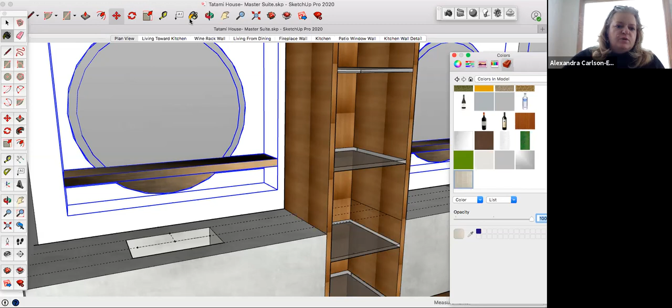And I'm going to go ahead and cover that wall, and it went down all the way perfect because that's kind of how I wanted it. I wanted to see the contrast between the teak and the concrete and this tile.

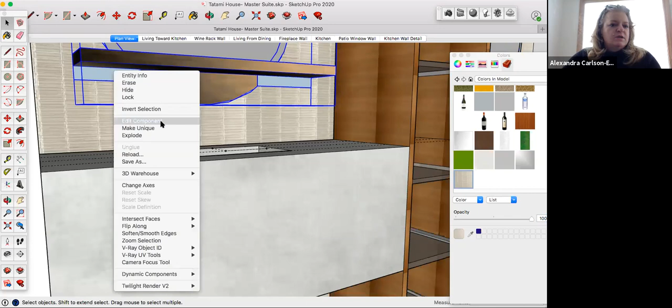Now I have an error on this one little section here, so I'm going to go ahead and say edit component. I'm going to make that go away. There we go. All right, so that's how I would go about doing that.

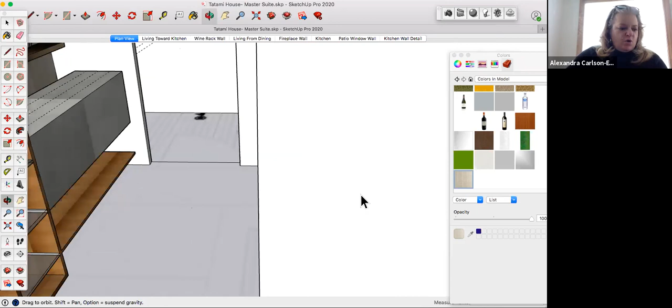Now, back up over in this area of my model, what I had planned was teak on the floor. I could, in theory, paint teak planks on the floor, but I'm looking to actually indicate that this has a texture and a relief, and it's wrapping all up the wall. It's also going to be inside the sauna shower. So this is kind of an important detail that I want to try and get right.

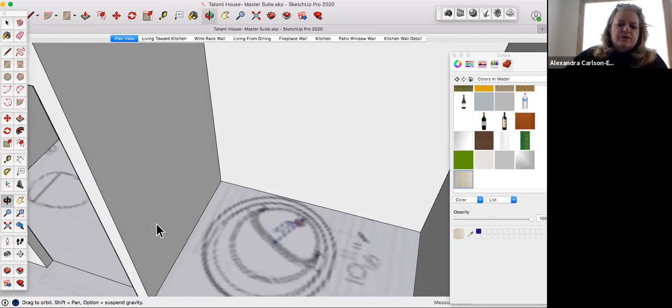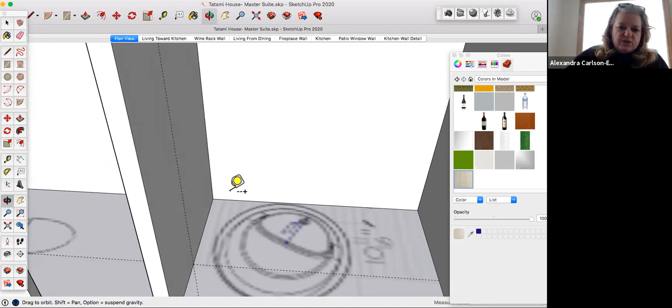So what I'm going to do is first I'm going to go ahead and make a reference line, so that way I know where this stuff is going to line up. Pretty important. The other thing I'm going to do is I'm going to start, because I can actually look at these and I can say, oh, okay.

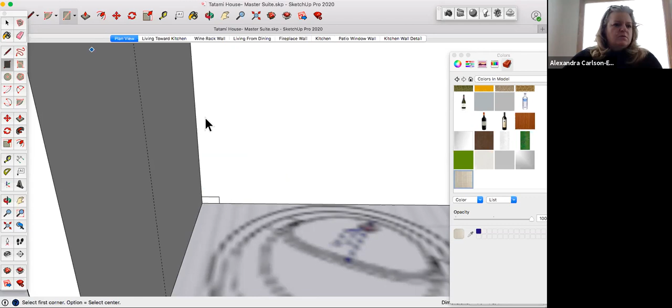So like right here, it's going to be on edge. Okay, I have to figure out how I want to do this. So back up to go forward. How wide is this? That is 2 feet 10 inches. All right.

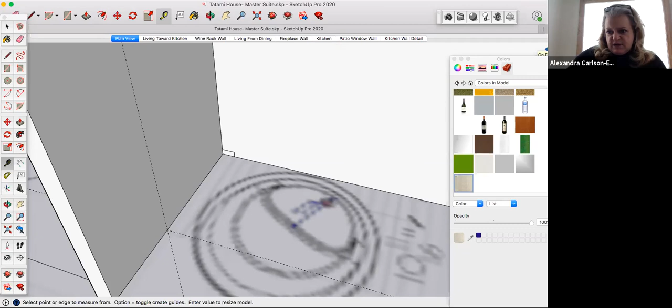And then this is going to be what? What's the width on this? I can't see it, let me move some of this stuff out of my way so I can see it. Okay, so it's probably going to be about 4 inches. So what I'm going to do is I'm actually going to do it out here. This will make sense why here in a minute.

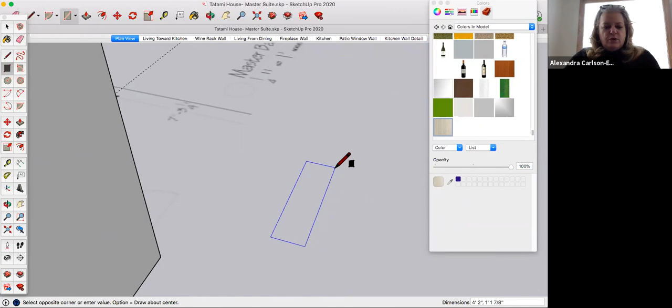I want to go 2 feet 10 inches, 4 inches, there we go. And I'm going to, because I'm only trying to do a texture, extrude it 0.25 inches. I'm not going to make this real thick.

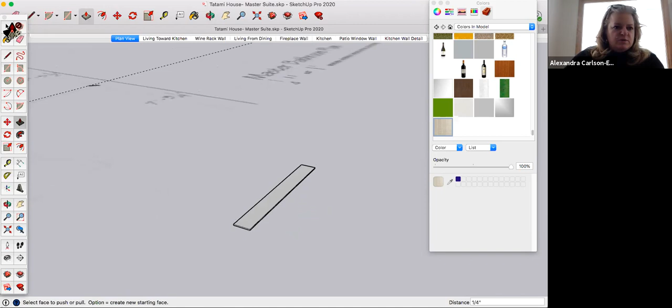The other thing I'm going to do is I'm going to take this. Let me make sure I'm not including my drawing because I don't want to do that. I'm going to right click and say make a component. All right, and this component, teak plank.

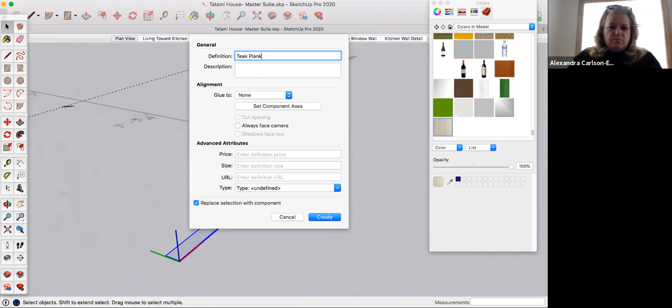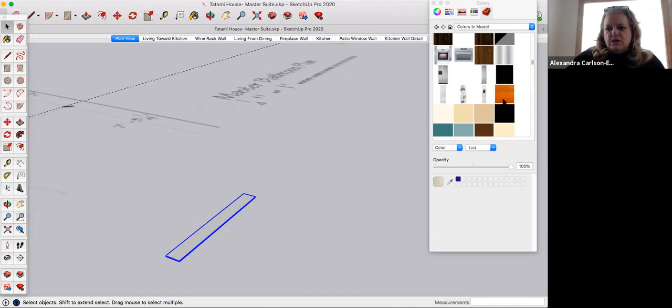Great, all right. Then what I want to do is come over, and because I made it a component, rather than having to worry about getting all the different parts of it, I can find my teak sample, which is, I believe, this right here, and it will paint the whole thing. Okay, so see how that worked out?

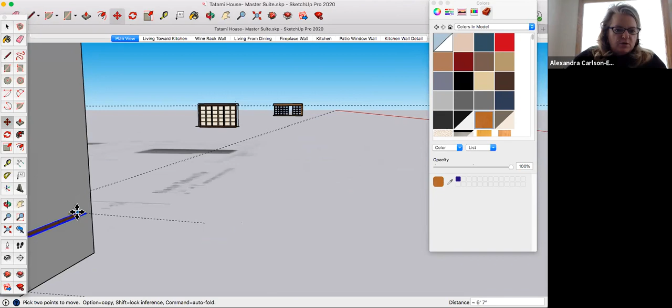All right, so here's the cool bit. I'm going to take this, I'm going to move it, I'm going to move it down into this section. Now, what I need to do though, is I'm going to want a slight gap between these.

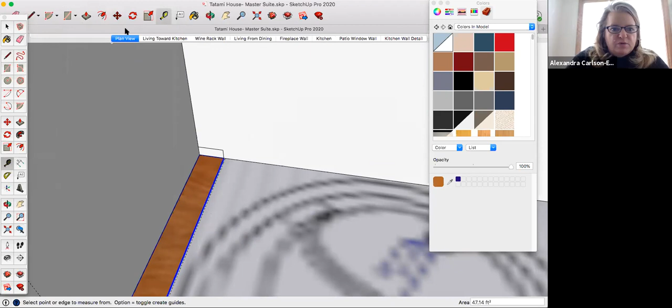So I'm going to take this, move it over, say 0.25. Okay, so edit, copy, edit, paste in place. And then I'm going to move, and remember, I'm going to hit my right arrow. So, oops, that's the wrong one. There we go, I want to move it right into place.

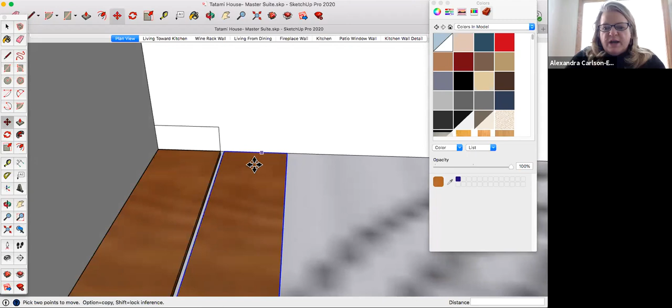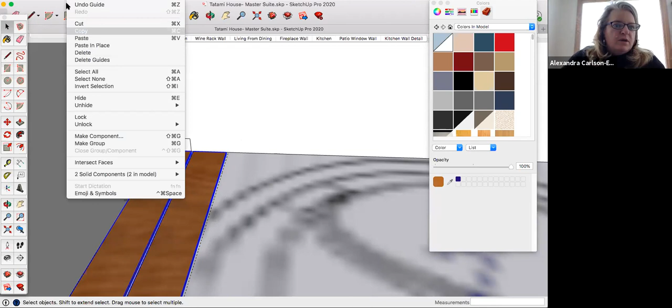There we go, see how nicely that lines up. When I add my floor here, this will just read as a little bit of pattern and a little bit of depth. So I can do the same thing here. It's a little tedious, 0.25. But now, instead of just doing one, I can copy, edit, paste in place. Then I can move all of them, and it all lines up. I'll do that all the way across.

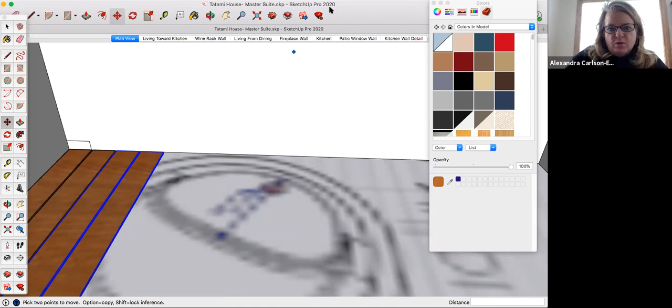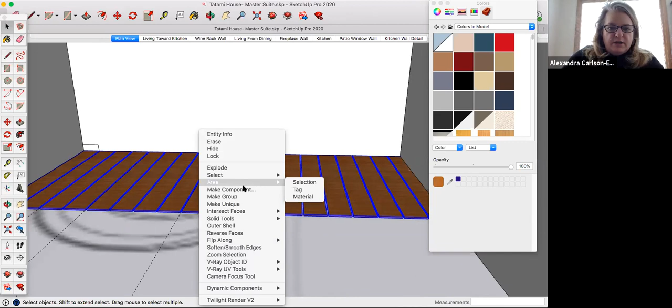Okay, so now I have all this laid out. What I'm going to do is select all of these, because remember I had this as a component. I'll right click and say make a component, and I'll call it teak cladding.

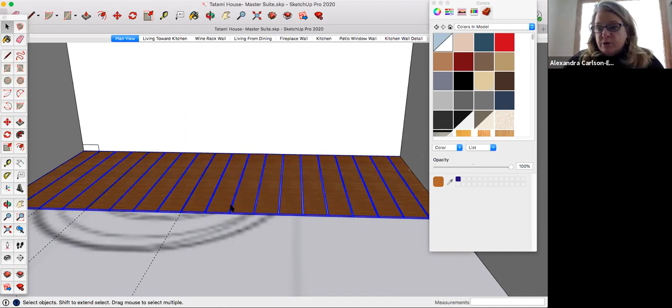Now, some people may wonder, why is she using wood in a bathroom? Teak can actually be used in wet applications. It's used on boats, high caliber boats. It's used in Asia frequently in wet applications. So that's why I have it inside a wet environment here. You can even buy bath furniture, like stools and things like that, that are actually made of teak. So that's how I get this.

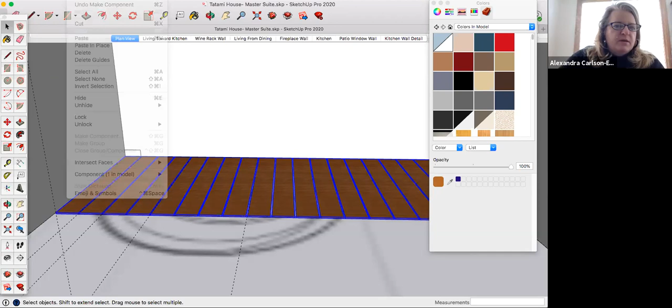Now what I'm going to do is edit, copy, edit, paste, and just line it up for right now. Go about halfway up the wall. All right, and then I'm going to zoom out.

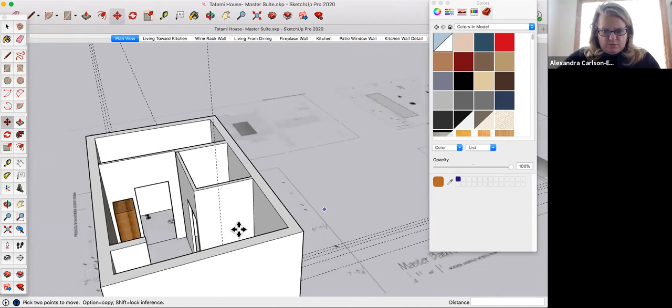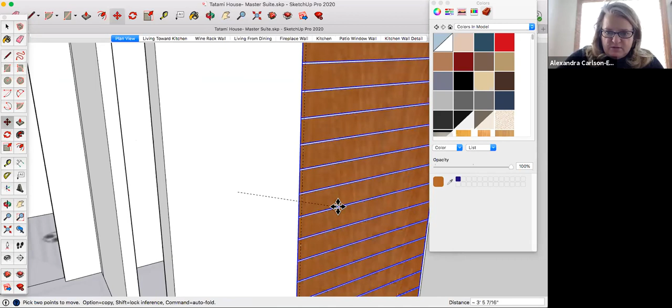It's actually in the wrong location right now, but that's okay. What I'm going to do now is get on the correct set of grips and rotate it, and then move it into the correct location, like so. Let me come down on that endpoint and make sure that I get this to line up. There we go.

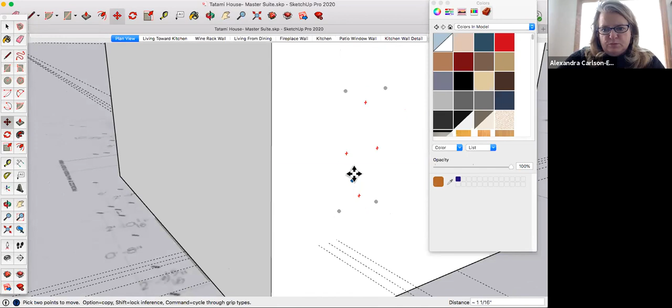Now, if I need to, I can just manipulate this a little bit so that it pulls away from the wall so you can see it as the texture that it is. Sometimes this takes a little bit of work.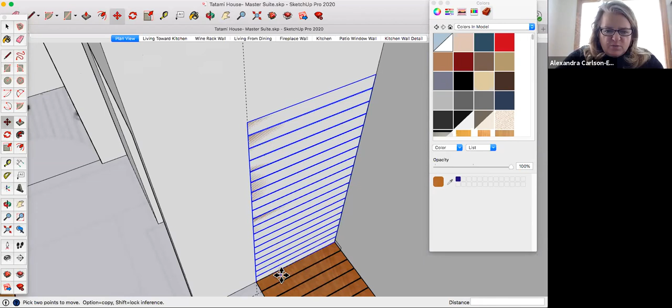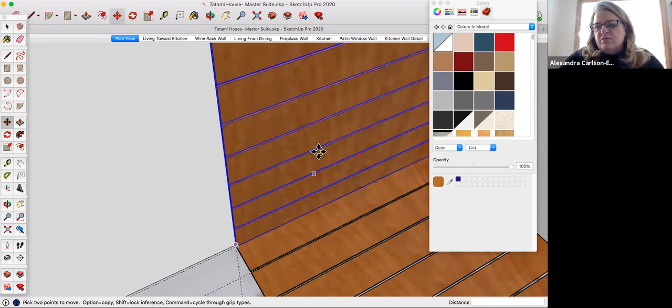So one of the ways you can actually make this a little bit easier is just snap a guide and say, okay, I want it to come out 0.25 inches. Then I'm going to try moving this again, snapping from that corner forward. That's how, if it's really giving you fits and starts, you can go about and manipulate that so it lines up correctly. It's still flush with the wall, but you have the proper reveal.

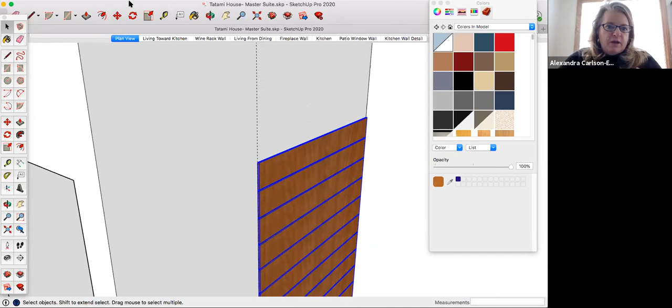If I need to change this, there's a couple things I could do. I could copy and paste this to extend it up the wall, all the way up, or I could go back over and say window, components, and there's that. Where's my teak plank? I think that's what this is. Yep, teak plank, bring that in. Let me do this. Where'd you go? Okay, there we go.

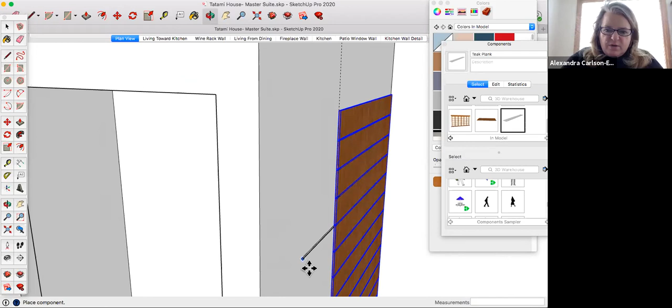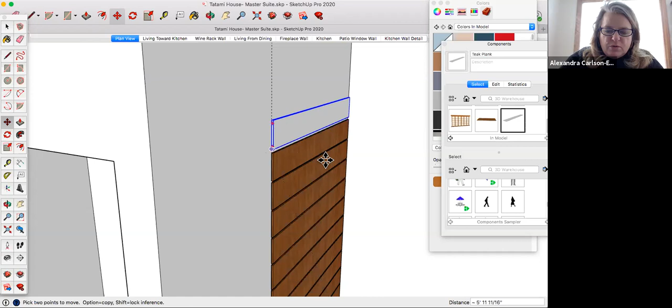I'm going to rotate this, and then bring it all the way out. I don't think that's quite right. Okay, I might have to actually wind up repainting it, but that's how I would go ahead and get it to go all the way up the wall.

So if you're dealing with most textures, you can just paint and you're fine. There are certain ones where sometimes you have to create the texture for it to look right, like this planking, for example, or if I was trying to really get the texture of shiplap, I might approach it the same way, so that I have what's called the shadow lines when I'm done. That's one of the reasons why we do this work in the first place in designs.